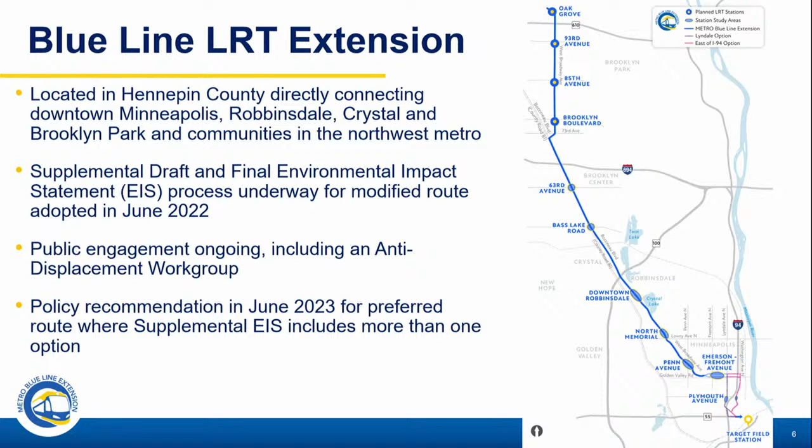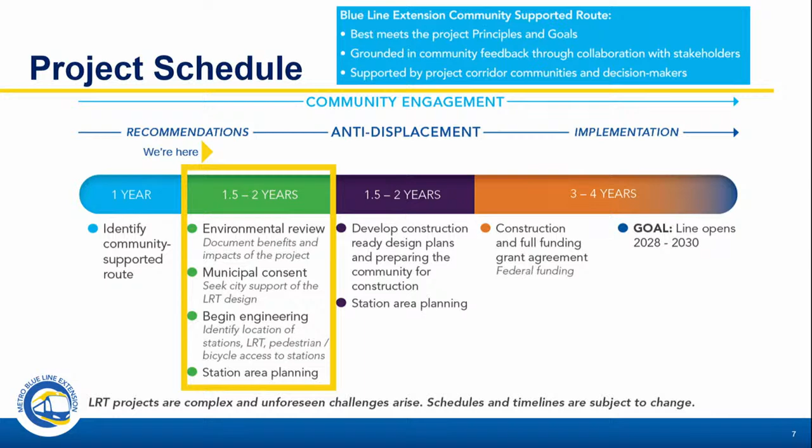There's off-board fare collection, fast, frequent, all-day service. There are station amenities such as real-time signage, video surveillance monitored remotely at stations for safety, fare collections, shelter amenities, benches, lighting, heated shelters, and things like that. So they have a lot of commonalities.

They also are intended to move regionally through the Twin Cities. There's also a local bus network and other forms of transit that integrate with this backbone metro system. We just wanted to highlight that for you.

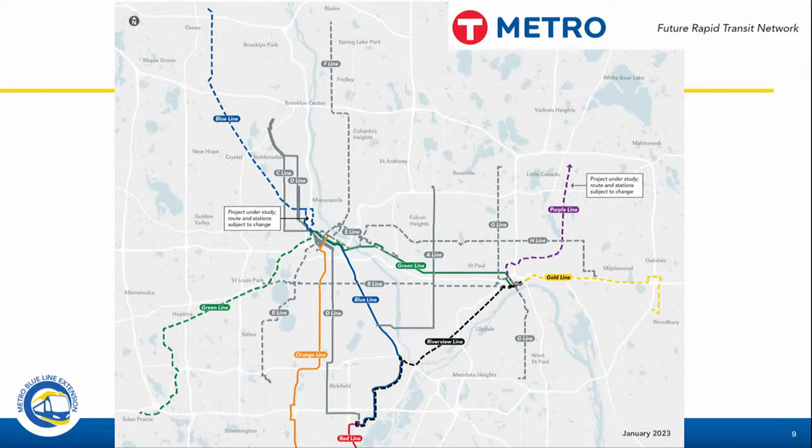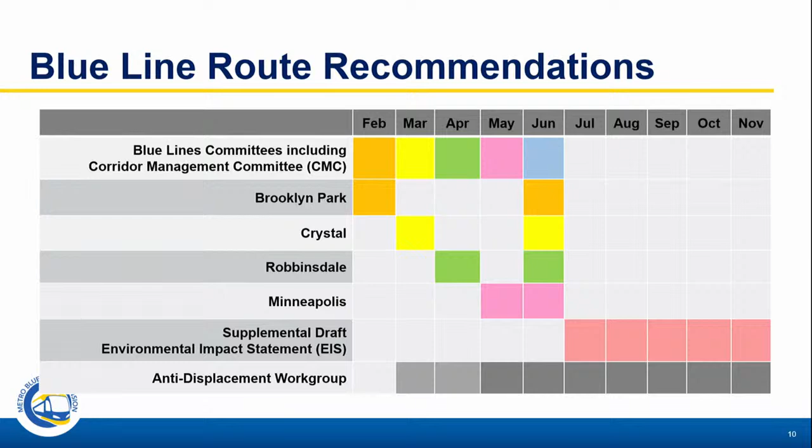As far as our outreach and engagement plan, we're about halfway through. We've had a number of open houses in all 4 cities now. We've been in Robbinsdale this week and in Minneapolis, we're doing city council updates as well, and working through the committee structure. Next month, we'll still focus on Robbinsdale as we work through our project committees.

Again, we'll take a look at Minneapolis and see the technical information needed to make a decision, and see if we need to make any adjustments for the Minneapolis decisions, because there are some pretty significant city decisions within the city of Minneapolis. So more to come on that.

That's all I have for a project update, so I'm happy to entertain any questions. Thank you for that update. Are there any questions?

Seeing no questions, we'll move on to the environmental update with Kelsey Young.

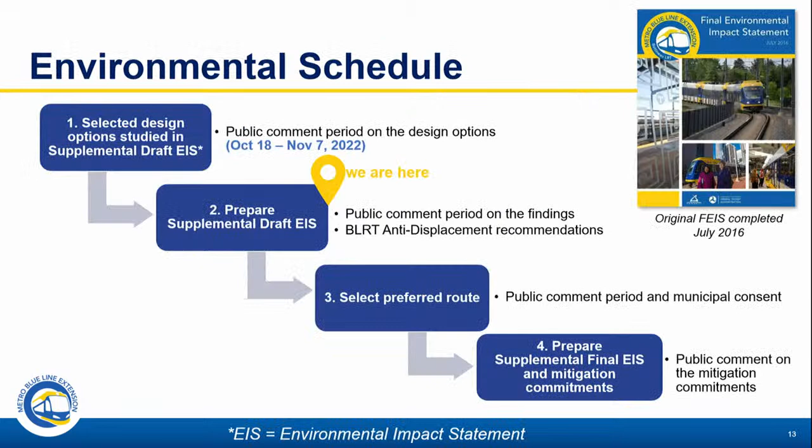Thank you. For today, we are highlighting two chapters of the supplemental draft EIS. The first one is Chapter 4, which contains a number of community and social analysis topics. To recap from our previous meeting, for each of these topics we look at both short-term impacts during construction and long-term impacts once the light rail is up and operating, as well as potential mitigation items for consideration. Those get formalized in the supplemental final EIS step in the future.

Within Chapter 4, we have socio-demographic information about the people living and working along the corridor. There's also a section on land use plan compatibility, where we look at the land use plans and comprehensive plans for the municipalities along the route, as well as Hennepin County, and how the light rail project would interface with those land use planning documents. We also look at community facilities along the corridor, as well as community character and cohesion.

We know this is a topic we've been hearing a lot about in our outreach as a topic of concern. So we look at both access to community facilities along the corridor, as well as how the introduction and construction of the project would potentially impact the character of the community.

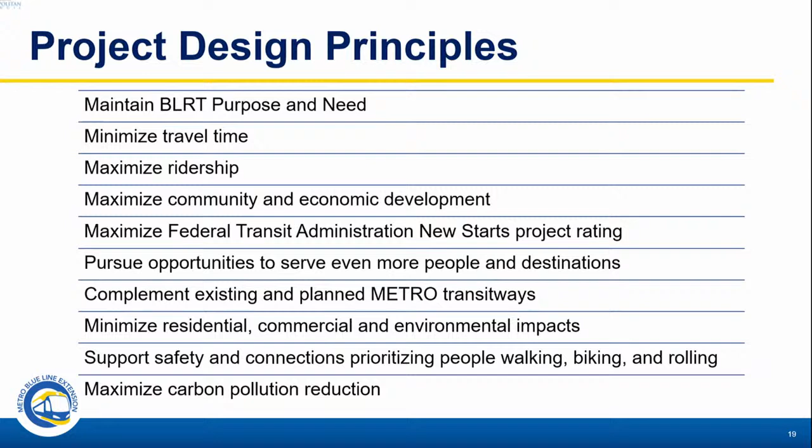What I'd like to remind folks right now is we are pre-30%. We are more at a conceptual preliminary layout design to inform what would go into an environmental study. So the work we're doing now is more two-dimensional, to show how things will fit in. We do look at elevations at key points, but it's very plan view, two-dimensional, and very conservative—to show what impacts, how a light rail alignment, how the roadway fits, guideway fits, sidewalks, how we get folks to where stations would be, and how they fit within the context of that community.

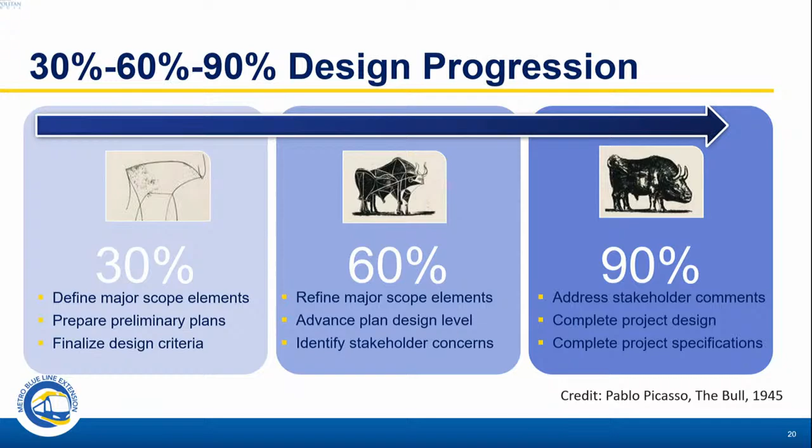That's very interesting. I really like this design progression. I think it's very useful to have that visual of the process and what to expect to be completed. There's so much that has to be done at that 30% level in terms of community engagement, in terms of getting the scope elements and all of the criteria. So to see this and hear people's concerns that, oh, this is already decided—this gives a better picture, I think, of how things progress.

You can continue. Thank you.

Moving back to Crystal, in your packet we have a handout of our design decisions document for Crystal. As with all of our committees, these will be draft as we work through it because it's a working document. It documents our key decision-making phases, the engagement plan, the list of decisions we're doing, the community input we get, the environmental considerations we're looking at, the stakeholder input, and any outstanding issues and questions we have in design.

So this is helping us with the design, tracking what we're doing, documenting it, and able to give this to our environmental team for the draft environmental impact statement. But it'll also be a live document that will continue through with our design to keep tracking those outstanding issues and making sure we address them as we're going forward.

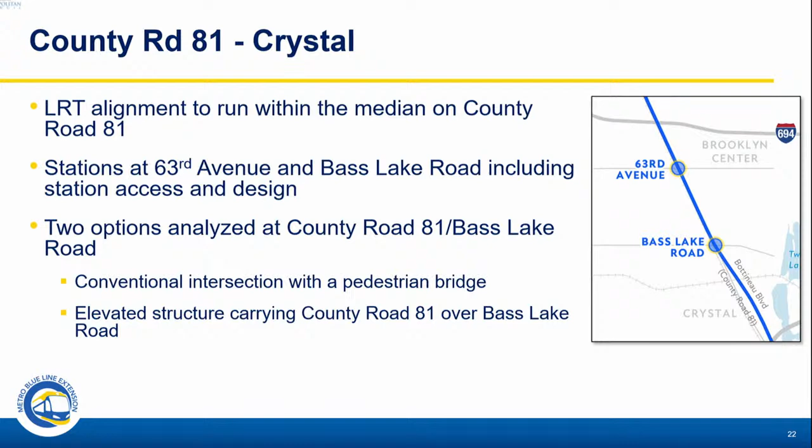Except when you get to the stations like at Bass Lake Road, and farther south, the southbound access from County Road 81 down to Highway 100. So our next decisions are looking at Bass Lake Road: how can we accommodate that intersection to keep the vehicle capacity in the roadway, but also handle light rail transit?

So we looked at two different options here. This graphic or photo shows us looking northbound up at the Bass Lake Road intersection—County Road 81 runs up and down through the screen, and across is the Bass Lake Road intersection. As I said before, we're studying that traffic capacity and the intersection, and we identified key points where we had pinch points at Bass Lake Road and down at Highway 100.

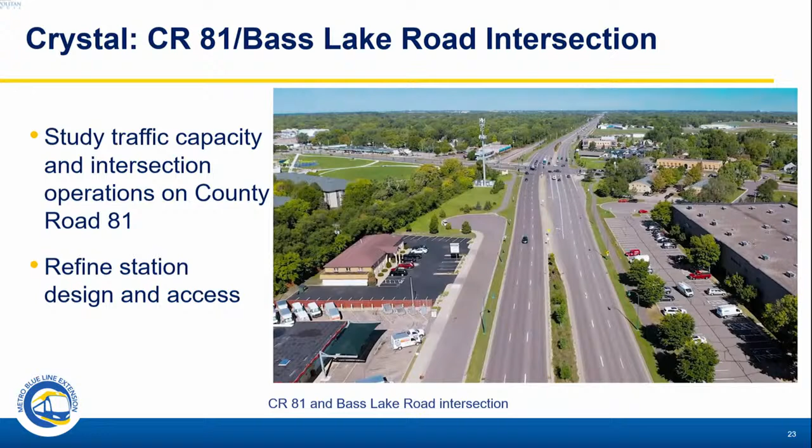We also want to look at how we refine this station design in this area—we're looking at a station at Bass Lake Road. A couple of options we've come up with to evaluate: an at-grade section. The capacity at these intersections was an issue if we narrowed it down to 4 lanes. So if we kept it at grade, we understand we would need to continue the intersection similar to what it is today, with 6 lanes through there and the turning movements.

Keeping the station at grade, center-running, this is what it will look like. This graphic shows basically over Bass Lake Road, looking south at the station platform with the blue roofs and the lane configurations on either side.

Access to this station platform would be both at grade at the intersection, so you see the crosswalks at the bottom of the screen, and we evaluated that we need two points of access for safety on the station for ingress and egress. What's shown on the upper side of the screen is a pedestrian bridge that crosses over 81 and offers access at the station with a vertical circulation tower including elevators and stairs. On the left-hand side we show a switchback ramp to get up to that pedestrian bridge, and on the right-hand side a spiral ramp that also gets to the bridge.

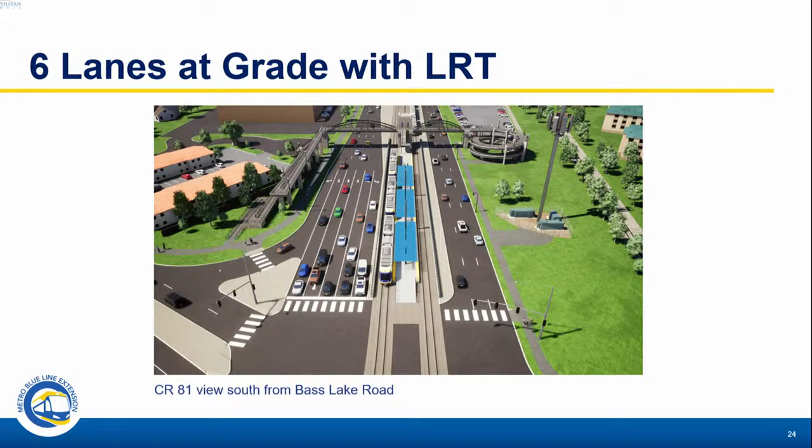One of the key things is we looked at these intersections and how they operate - the potential operation here, the safety considerations. This graphic helps visualize that. We looked at conflict types: where you could have a vehicle-to-vehicle conflict, or pedestrians crossing the road in front of a traffic lane - that would be considered a conflict.

The different conflict types we evaluated are crossing conflicts - those are for vehicles, shown as open circles. In this at-grade configuration, similar to today, this just shows the light rail in the middle, but the intersection itself operates as it does today. So there's 68 crossing conflicts in this map with vehicles. Merging conflicts are where, if you're taking a right turn and have a conflict with through-lane traffic, those are shown in the half circle area - about 11 merging conflicts.

And then pedestrian conflicts - this is key for us as we look at station platforms, getting folks to the station safely across the intersections. Those are shown in the diamond, and we have 31 pedestrian conflicts here. So this really shows the existing condition, but also at-grade with the station in this area, what those safety concerns or conflicts would be.

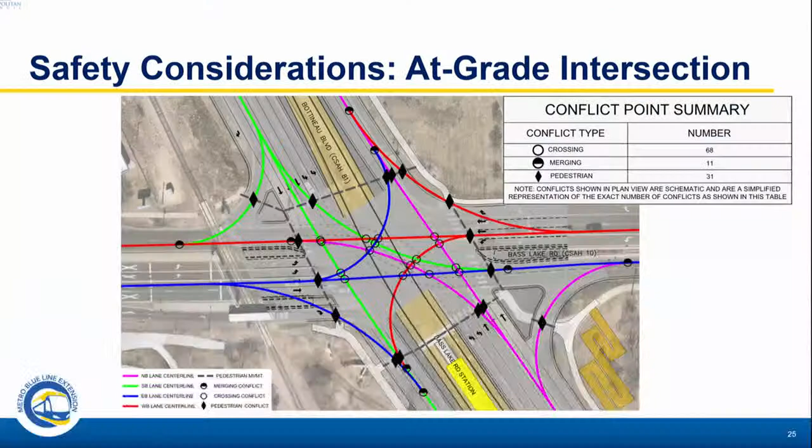Well, that's really complicated, and I can see that the engineers have been very busy. There's a few more slides here that show a comparison with our other option we're going to evaluate.

One last thing to talk about is pedestrian access - how pedestrians are going to get across the roadway to the station. In this case we're showing the at-grade intersection. This is a plan view of the station in yellow in the center, the crossing of the roadway at the intersection, and the pedestrian bridge going up - that's the dashed greenish-yellowish line that hits the station on the right-hand side.

As we evaluate it, with those long switchback ramps to get up and across, it really starts extending the distance of the crossing to get people across. As opposed to crossing the intersection and waiting for the arrows, which would be under 3 minutes, taking the pedestrian bridge because of the distance ends up becoming about an 8-minute crossing to get from one side to the other.

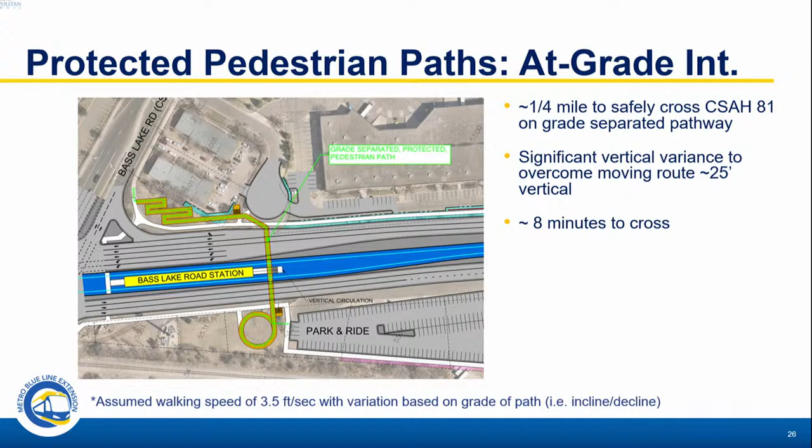Dan, are you saying the railroad's not flexible? I'm going to assume we probably aren't going to use the railroad. Just want to make sure I understood. So further on, as you see that park and ride, and get to the left-hand side of it, that's probably about as narrow as you can start getting to keep circulation and parking stalls on that side. Okay, thanks, if there's no further questions you can continue.

The next option we looked at is a grade separated interchange. What's shown here is looking north towards Bass Lake Road, going through the screen, with the up and down being County Road 81. This would be referred to as a tight diamond interchange. The through lanes of County Road 81 would go up and over the intersection so they would not have to stop there, which helps traffic volumes. You get the through lanes of traffic through, and whether you're coming on or off that interchange down to Bass Lake Road, that would be at grade intersections.

What's shown in between those two bridge structures is the station platform. We can keep the station and the light rail at grade through here, and it does quite a few things. It offers better access for pedestrians to get to that station without having to cross the higher speed, higher volume through lanes on 81. At the intersection, on the south end of that station toward the bottom of the screen, you can see that trail in white. You can cross underneath this structure to get to the station, or go all the way across without crossing the traffic lanes—a much more convenient way to get to the station, and convenient from the park and ride. It's in the shadow on the right-hand side, but that's the Crystal Lake Regional Trail, so it makes a very good connection for trail infrastructure.

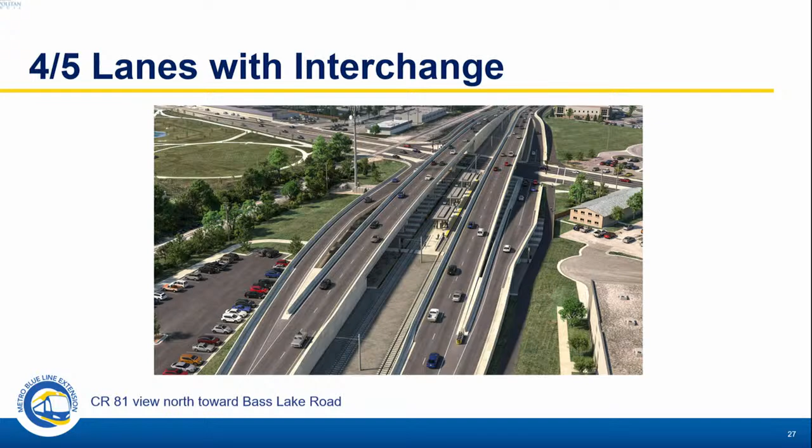Thank you, Chair. Those are key elements that the city has expressed concern with. As we develop the design, we want to make sure it is safe, it's inviting, but it's not a nuisance environment. We want to make sure it's well lit, and that it's open, so there's not shadowy, dark hiding spots. What's hard to see in this graphic, we have other concepts designed up that you can look through. We try to keep that area under the bridge open for access, so it's clear, wide open, well lit in the day and at nighttime too.

Can I ask one more question? I know the Southwest line has a lot of bridges, isn't that true, that they're building now? Were there similar concerns raised about the safety of people in the area and the darkness under the bridges?

I didn't work a lot on the Southwest design, but they have the Lake Street bridges up, and there's a station down below there. There are a number of areas where it gets a little bit closer.

Safety, both making it safe and comfortable for patrons, but yet not making it so inviting for people to hang out, has to be a design choice that has to be taken into account.

We'll work with law enforcement. I know we've already talked to the chief in Crystal, so we'll work with both local law enforcement and Met Council law enforcement, and other safety standards, to try to develop something that's lit and easy. Structures can help provide barriers from things like through traffic, but also provide different challenges as well.

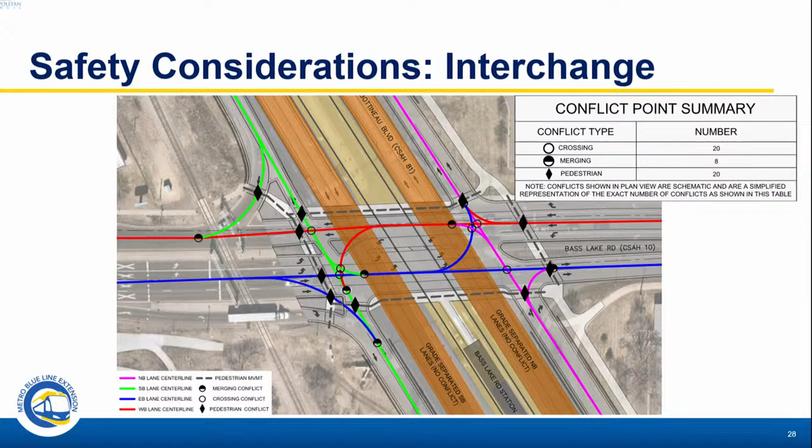This is the similar graphic we talked about regarding walk time. With the interchange, you'd have pretty much the same connection on that south end of the station, on the right-hand side here, where there was a bridge before and we were at about 8 minutes to cross. That same pathway across through the station and over to the park and ride area is about 3 minutes, which is roughly the same time it would take to walk across the intersection if you're waiting for lights. So very comparable. I believe that time difference would encourage more folks to use that safer crossing, because you're able to stay at grade. If you're coming off the trail on either side, your only crossing would be on the railroad tracks, with no roadway crossings.

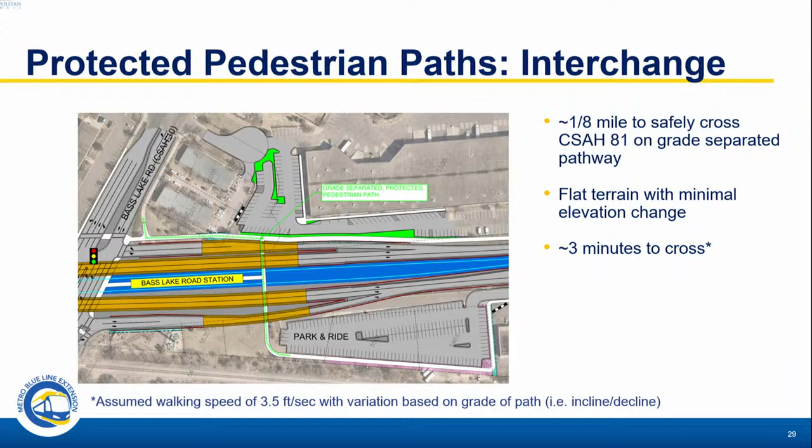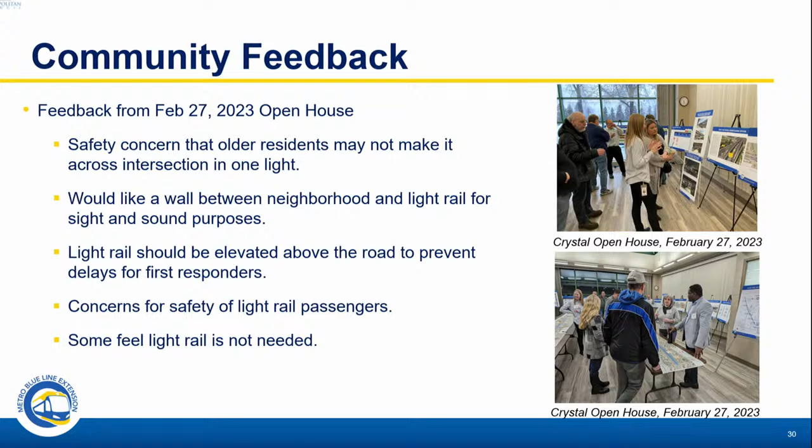Madam Chair, committee members, our outreach activities and engagement with Crystal communities continue to produce positive results. We are seeing increased attendance at our community gatherings, and we're also striking even more conversations with the business community. The most recent meeting was the February 27 open house. In terms of feedback, what we've heard is mainly related to safety, pedestrian crossing of the roadway, safety on the train, and also in the neighborhood as it relates to noise, maybe a barrier to shield that a bit. As Councilmember Wagner alluded to, we also had a question about elevating the light rail infrastructure instead. We also received comments from some community members who are not very much in favor of the project. This is very consistent with what we have heard in the past.

Typically, safety, pedestrian crossing the roadway as it relates to traffic along County Road 81. And crossing Bass Lake Road, pedestrian safety again, and also in terms of the design decisions that need to be made in Crystal, comparing the interchange option and at-grade option.

What we heard was that most of the community members who had attended the meeting had preferred the interchange option, and we're continuing to make ourselves available. Outreach coordinators are looking forward to attending various community meetings and making ourselves available to the community as needed. That concludes it. If there are questions for me? Thank you so much.

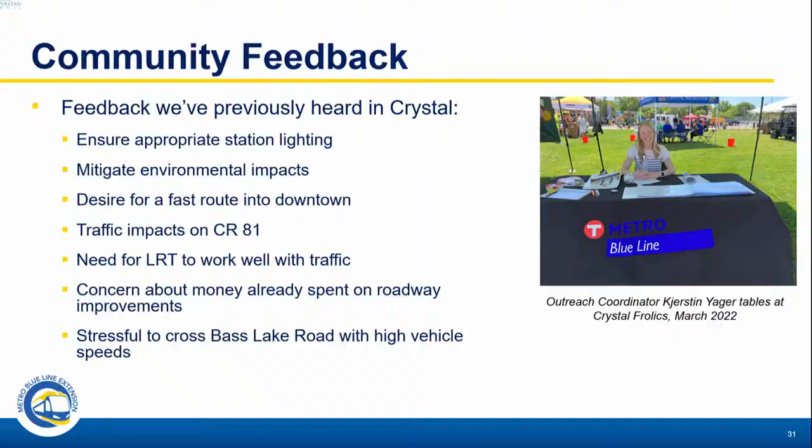Okay, so we will move on to, where are we? We're going to have the anti-displacement working group, but I think this would be a good time to have the BAC update. I think what I had to share might fit well with the conversation that's about to happen with the anti-displacement work group.

Maybe I could best summarize the concerns or fears that were voiced at the last BAC meeting. It kind of revolved around those businesses on that street where the light rail's coming through. It was emphasized that they rely on street parking now for folks to visit their organization or their retail store. And that's kind of alarming for them. One could argue there are other places to park in the neighborhoods behind that main thoroughfare, but what about parking in general for those neighborhoods, including not only commuters, but also folks who live there?

And I think there was a call for, let's study that too. And I think that best summarizes the concerns that were voiced at the most recent meeting.

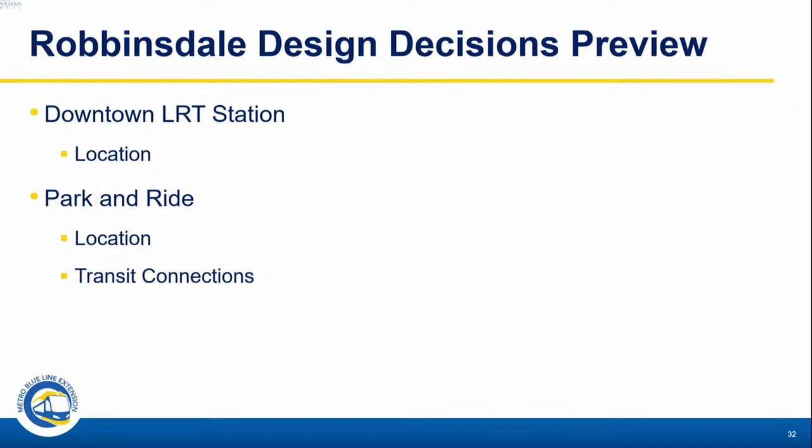Next slide is, and then in May, we get to Minneapolis and look at the design decisions and a few more there, where we have the Target Field Station to West Broadway options, whether Lyndale or the East of 94 options, as we get up to West Broadway and 21st, or West Broadway between Lyndale and Irving. Do we keep everything on West Broadway, or do we use 21st for light rail in that area?

Other thing is the number of stations and locations in Minneapolis, and then focus in on the Penn Avenue Station location.

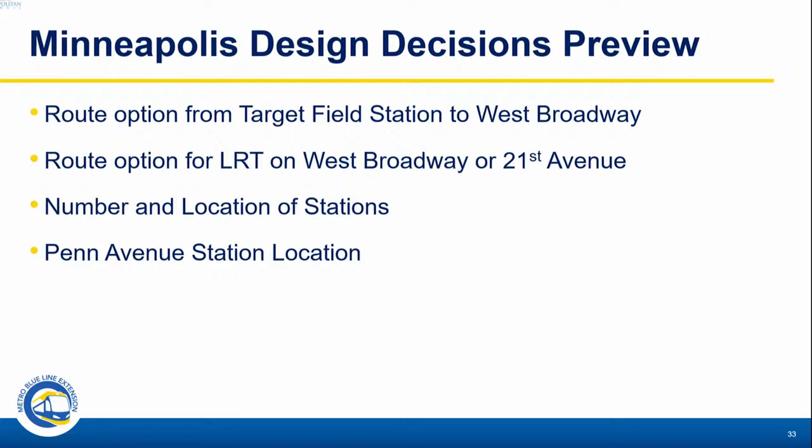Thank you. I think this is a good time to acknowledge that we did get some feedback from the West Broadway Business Coalition, and we've received that letter and are reviewing it and including it in our community feedback and comments.

Anti-displacement update. Thank you, Chair. So a simple update today. As we put our anti-displacement working group in place now a little bit over a year ago, the phase one work of that group has been completed.

We've had 4, and then eventually 5, Saturday workshops with the group, where the anti-displacement working group, supported by staff from our local agencies, has talked about past impacts on projects, residential displacement and residential impacts, commercial impacts, as Ricardo mentioned earlier, and cultural displacement possibilities and impacts.

That work has gone on and has been gathered together by our team and by CURA, our consultant helping us with this group, to now turn all of that feedback and discussion at those meetings into a recommended set of policies to bring forward. The structure will lay out outcomes that the anti-displacement work group wants to see, and then policies that could be implemented that would lead to those outcomes.

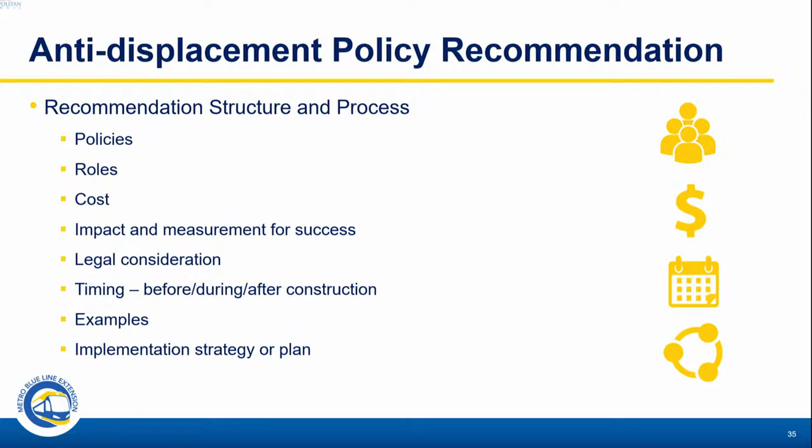Oh, that'll be wonderful, Commissioner. Yes, two quick comments. One, there's a lot of people interested in this, so thank you. And as you're summarizing the broader work, how to abbreviate that for federal partners, for statewide partners, so I just want to commend that.

It's almost like every topic listed here could fall into those three categories. I just feel like that's a really good way of organizing it. I got chills when I heard that. I got chills when I heard Ricardo come up with that. It's pretty good, it is really good.

We focused a lot, even on Central Corridor, on surviving construction. No doubt. But this idea of policies in place that help communities thrive after - that's really big. I agree, and just to note, that's the risk, right? If you're talking about anti-displacement, businesses are more at risk after the project when the value's been added to the land and they're at risk of being scraped away for larger investment. So I'm really excited about this framework that's coming forward.